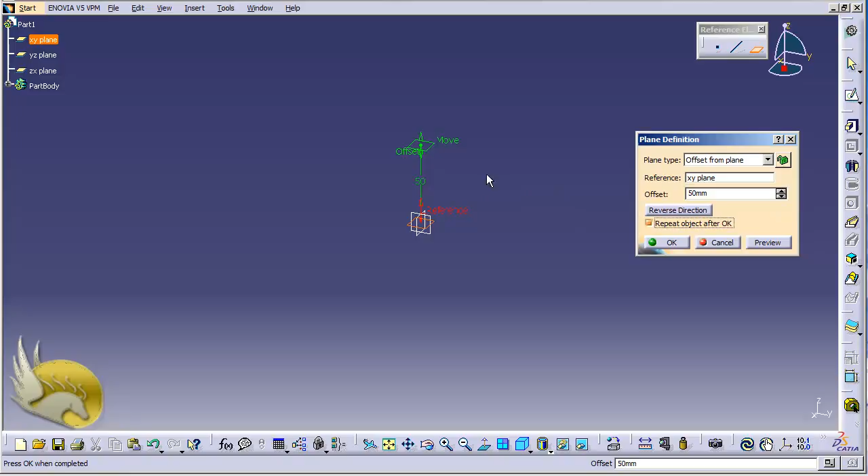I'm going to create some planes at 50 millimeters distance from each other. I want to have more planes, and I'm not going to create them one by one. For this, I click on repeat object after OK, and it tells me how many other planes I want to have except this one that I've created. I click OK, and it tells me how many. I select two more planes, so I click OK.

Now I have 3 planes created. So if you see this, I have created this plane and these 2 planes in addition to the plane that I created first. So I have now 4 planes. The XY plane is the first plane where I'm going to create my profile line.

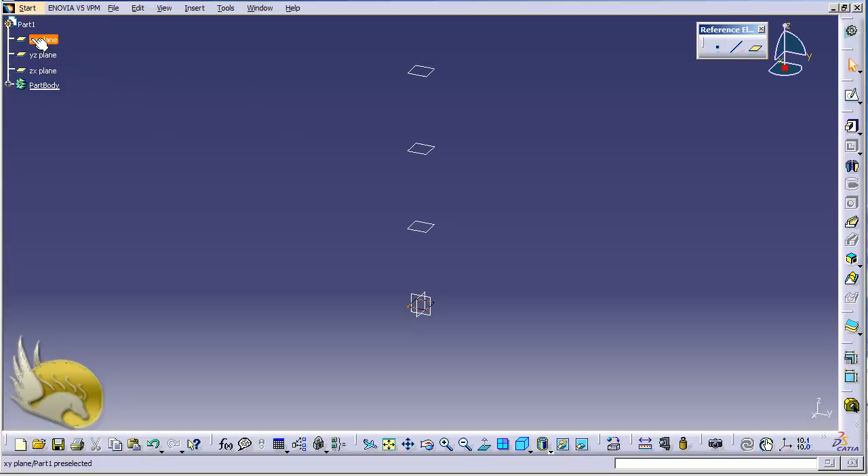So I go to the XY plane, click on sketch, and now I'm aligned to this. I'm going to use a very simple profile like a circle here. So I create a circle, and that's going to be about 50 millimeters in radius. I click on constraint and make sure the diameter is 100, so the radius is going to be 50. I type in 50 and click OK.

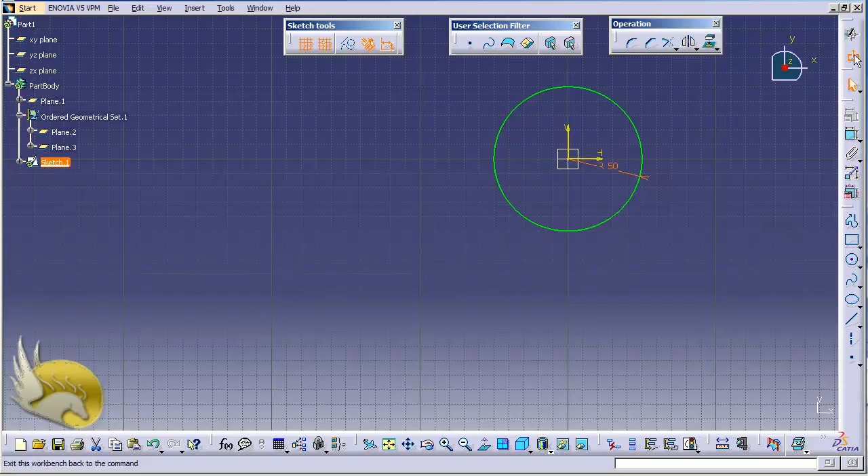Now this is the first plane that I have a sketch on. I open part body and you can see there is a sketch 1, and I exit my workbench right now. I select the next plane here.

This is the second plane. I go to sketch environment and create another circle. This circle is going to have about 80 millimeters of radius, so I type in 80 in the constraint dialog box and hit OK. And I exit my workbench.

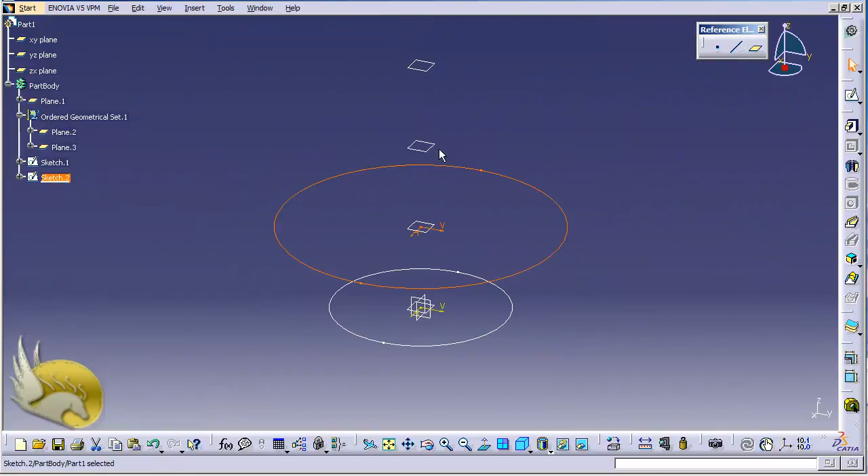Now I'm going to select the third plane. I go back to the sketch environment and create a circle again, and this one is going to have about 40 millimeters of radius. So I type in 40 in the dialog box and hit OK.

And I exit, and again the fourth plane is going to be selected. I come back to this environment, center this in, and I'm going to have the smallest circle here. This circle is going to have about 20 millimeters of radius. So I exit my workbench.

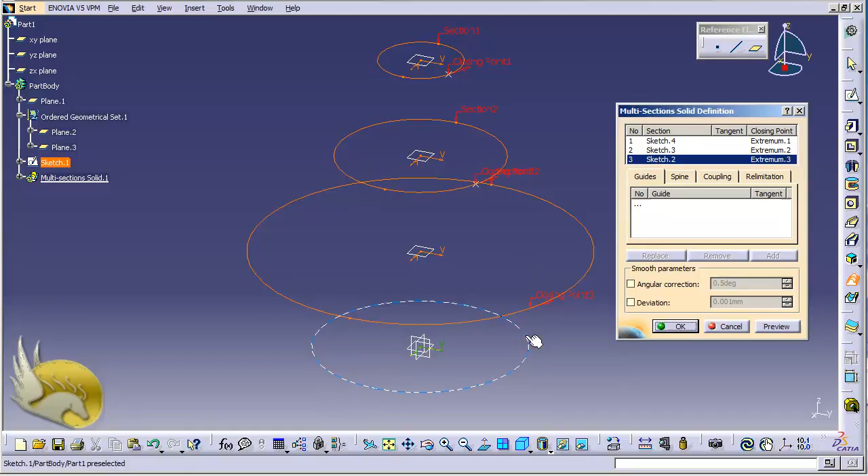Now you can see that I have 4 different circles here, and I can select the multi-section solid tool to create a shape out of these sections. So if I click on this tool and select circles one by one in order - this is the third and this is the last one - and click preview, you can see this is the shape it calculates for me. This is not what I desire, so I cancel this out and I want to have my own curve.

My own curve is going to be a very complex curve, and I want to make sure that some places have some more constraints applied to them. So I go to the YZ or ZX plane. Both of them are okay because they are perpendicular to the plane I've been working with. So I click on YZ and go to sketch environment.

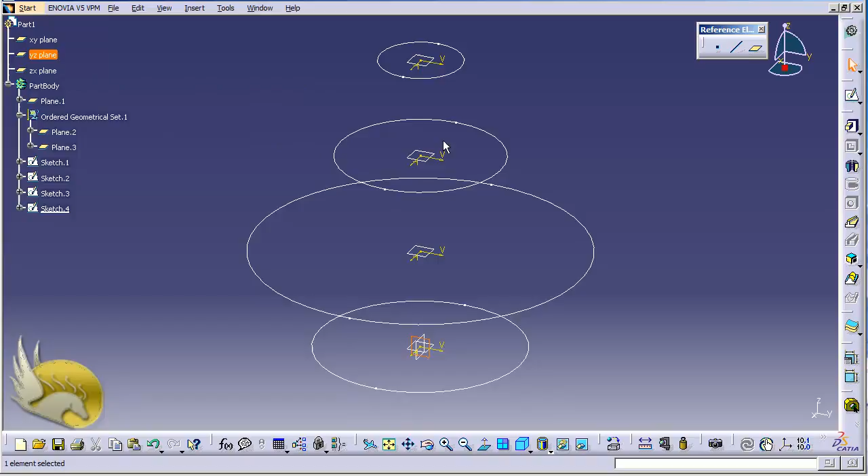Now I'm going to create a very simple spline here. Let's close this and click on spline, and I click here 1, 2, 3, 4, 5, 6, and on the 7th point I double click to end the spline. So I have a spline with 7 points. You can have more points, but 7 is okay for me.

So I want to make sure that this spline has some common points with the circles, but these are separate sketches. The only thing I can do is create some constraints here and make sure that they are as adjacent as possible.

So I go and click on the constraint tool, click on this point, the first point, and click on the vertical line, and make sure that the distance is about 50 millimeters. This is the radius of this circle.

So the second constraint I need to add is this. I click on this point, click on the horizontal line, and make sure that this is about 0 millimeters, so these two are coincident to each other. I could not use a coincidence constraint because these are separate sketches. If they were in one sketch, I could use coincidence constraint, but that's not possible here.

So let's go to the other points. I select the constraint tool, select this point, select the vertical axis, and make sure this is about 80 millimeters for the second plane, and this is okay. And now again I select this point, and I can select this and make sure the distance is 0, or I can select the horizontal line and make sure this is about 50 millimeters.

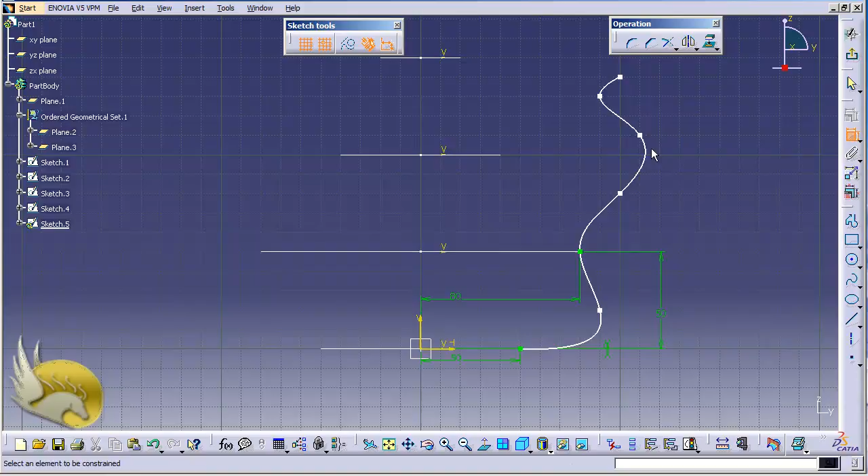I click on the constraint tool here, and the vertical line is going to be about 40 millimeters for this plane. So I type in 40, and this was the radius of the circle that I had created in the third plane. So I click on constraint tool again, make sure the point is selected.

Now I'm going to select this. This is not going to be selected. Make sure that this is 0, for example. Or I can go and check this with the horizontal vector here.

Now the last point is going to be selected. Make sure that this is about 20 millimeters away from the vertical axis and about 150 millimeters from the horizontal axis, or 0 from this circle. Both are okay, so I make it 150.

So you have created this. You should make sure that whenever you rotate this, it doesn't create a cusp, meaning it doesn't cut itself. So to do this, I'm going to select these points and move them to where I want.

I can of course create some constraints for these, but this is okay right now. So this is the shape that I need to have, for example. Of course you can change this to your desire, just make sure that it doesn't cut itself whenever it is going to be rotated.

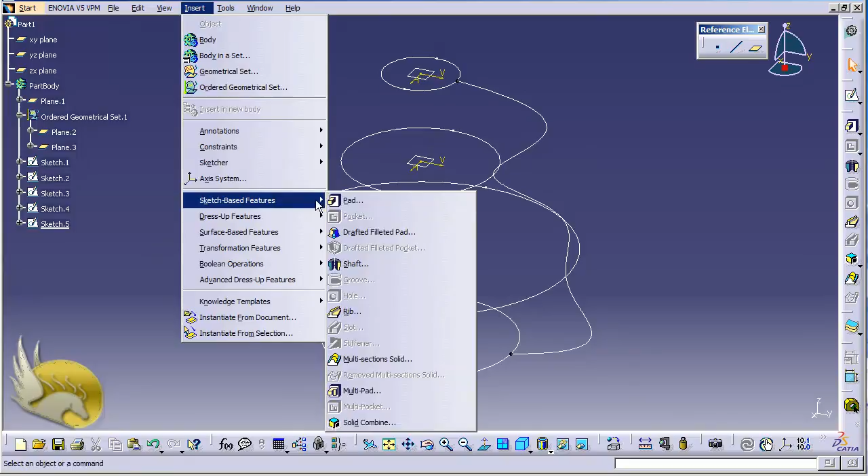And now I select the circles one by one. This is first, second, third, and this is the fourth. Now I click on the lower pane on this ellipse and make sure that this is highlighted, and select the curve that I have here.

So if I click on preview, and if I have created the curve correctly, this is the shape that I am receiving. So this is kind of an awkward shape. I don't want to have such a thing.

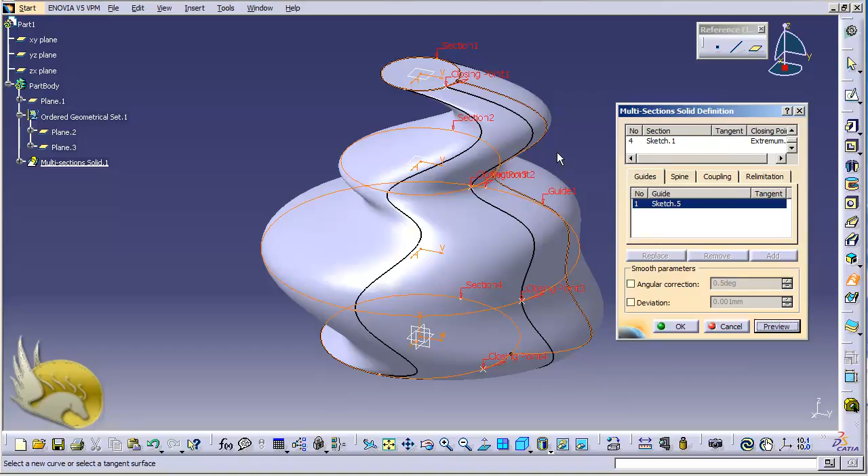I need to have an exact copy of the curve on the other side. So I cancel this out again. Now I want to have such a curve on the other side so that whenever I'm rotating this, I create a very perfect shape. So how can I replicate this to the other side?

I can modify this sketch and create a mirror on the other side, but this is not okay. If you do this, multi-section solid does not recognize them as two separate guides. So this is not okay.

I need to have another sketch and have this replicated to that sketch. So this was in the YZ plane, so I go again to YZ plane. And I'm not going to modify this, so I do not go to sketch 5 and modify the sketch.

I'm going to YZ plane because I created this in that plane. I go to YZ plane again, repeating this several times, and I click on a sketch. Now this is sketch 5. I want to have an exact copy of this in the YZ plane.

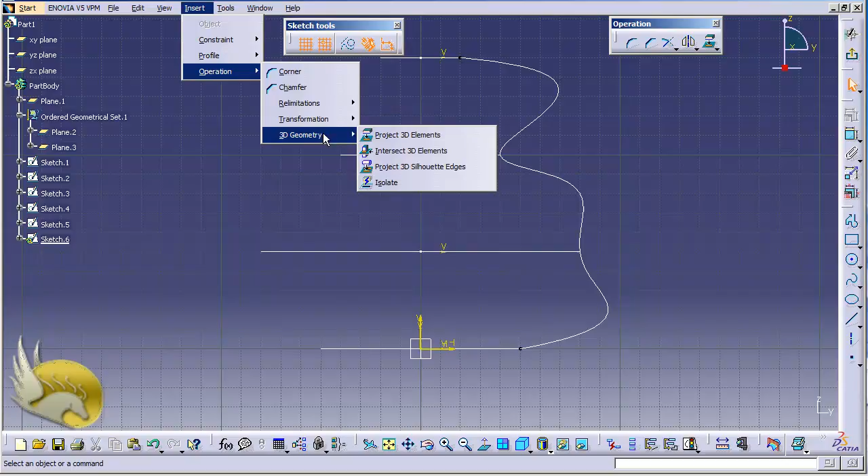So I go and select the project 3D elements from operations. I can go to insert menu, operations, and select the transformation in 3D geometry. I can select the project 3D elements from here. So I click on this.

And I go and select sketch 5 and tell this to create a new sketch out of this. So I click here, and now I have sketch 6 here. So this is exactly the same as sketch 5.

Now that I have this, I want to move this to the other side. And to move this exactly, I need to use the symmetry tool. I guess I have worked with the symmetry tool, but if I have not, I can do this.

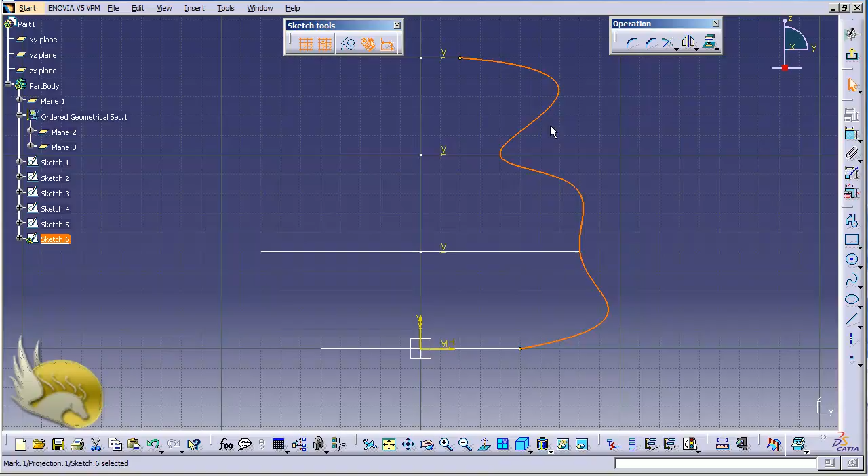I will select this sketch and go to the operations toolbar and select symmetry. It is near the mirror. Or you can go to insert, go to operations, go to transformation, and select symmetry here.

Symmetry is like mirror, but it does not create another object. It just moves the object to the other side of the mirror. So I click symmetry, and now sketch 6 is selected.

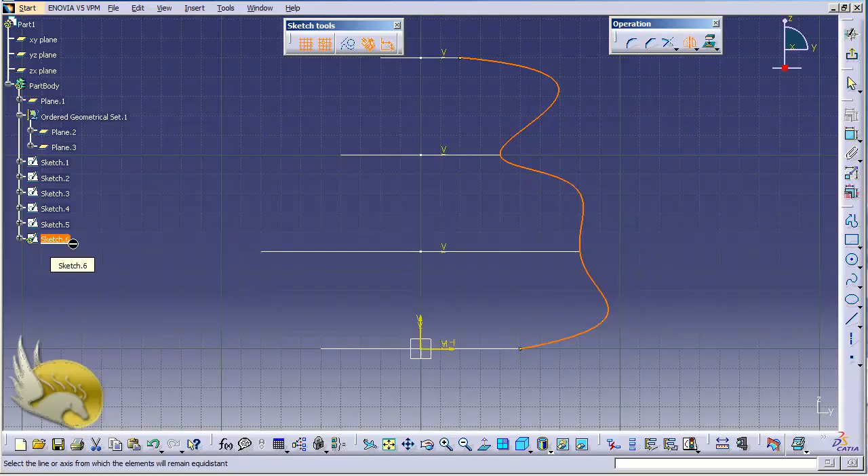And now I click the center line, I mean the axis that I need for the symmetry. So I click on here, and you can see that sketch 6 is moved to the other side. And this is sketch 5 that I have used to project sketch 6 out of it. Now I have two different sketches with the curve that is exactly what I want.

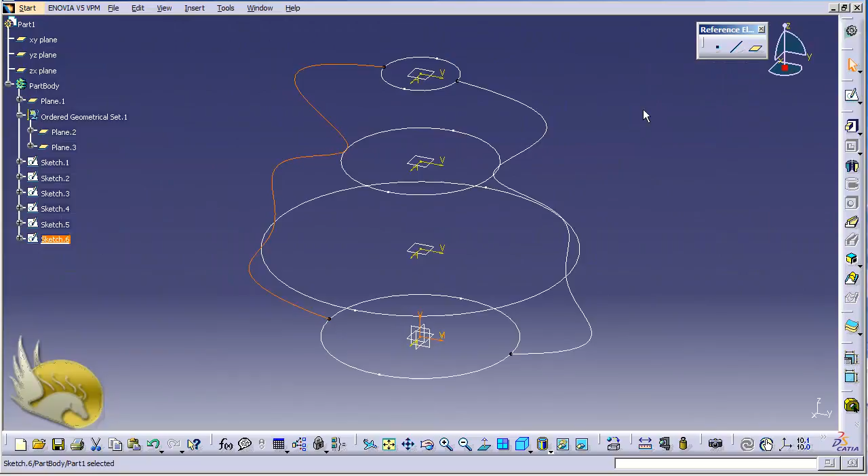So I exit my workbench. I click on a blank area and select the multi-section solid tool. Now with the upper pane selected and highlighted, I select the circles one by one. Now this is the third one, and this is the last one in order.

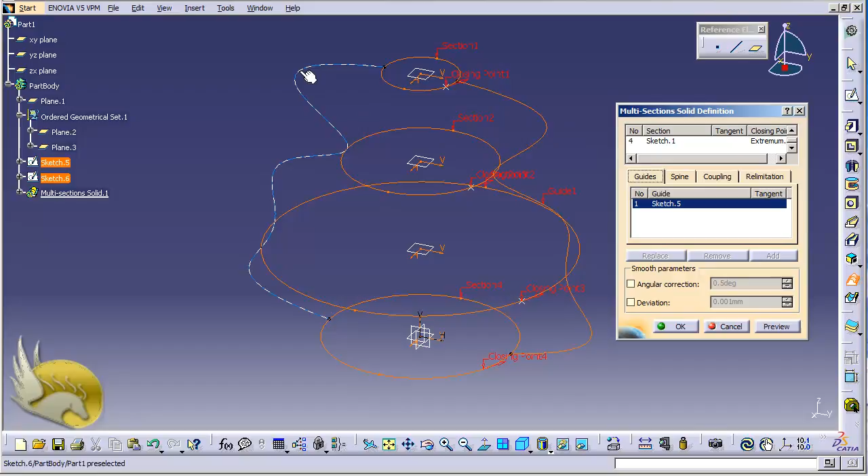And now I make sure that the lower pane is highlighted by clicking on this ellipse in the Guides tab, and now select the splines one by one. Now I have two guides, I have 4 sketches. I click on preview, and this is a perfect shape that I have created right now.

So I click OK, and this is what I have created using the multi-section solids. So now you know how to create planes, how you can create extra planes, how you can use the symmetry tool to create a mirror of your object, how you can use the project 3D elements, and a lot of other tools to create such a complex shape.